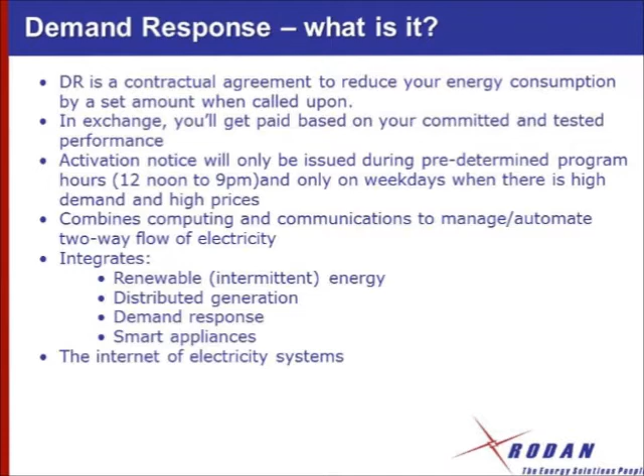So demand response, what is it? To start, it is a contractual obligation, and that's my job out in the street with customers, to introduce it to you folks. It's a contractual obligation to reduce energy consumption by a set amount for a set period of time.

The ISO, or the province, rather than importing expensive power from the US or Quebec or wherever else, or rather than turning on a peaking generator, will activate our suite of customers, or our portfolio of customers, to reduce that set amount. We have almost 300 megawatts under contract, so we act as a power production facility by reducing load on the grid rather than producing onto it. It's a unique way of creating a stable grid.

The activation notice is very specific. It's all done in a contractual fashion, from 12 noon up to as late as 9 p.m. at night. So a commercial building, for sake of argument, would only be participating from 12 noon to 6 p.m. They wouldn't be forced to do anything up until the evening.

But a lot of the bigger industrials have processes they can shift or shed to a later period, and for that there's fairly significant financial remuneration for shifting operations or curtailing. Some of the big steel mills can simply turn down a blast furnace for 4 hours. That's a big sigh of relief for the grid—on a screaming hot day in August, they can turn all of that stuff down.

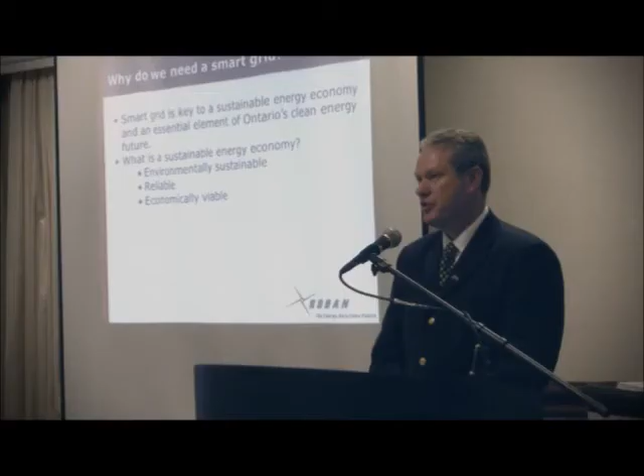Hydro One operates on a 5-year approval process and a 10-year implementation process, so when you understand the energy sector and how slow it takes, getting the rollout of the smart meters done was pretty impressive, and to work with that group in a 10-year business cycle. I don't know any business cycle that can work under a 10-year business model, but that's how they do it.

So the next image is basically a picture of the smart grid. It kind of gives you an overview. We've all seen this before. We all live it every day.

The idea is creating a truly smart grid and creating buildings that will talk to one another. I rely on you guys installing systems and strategies to help buildings communicate better, understanding how the system or how a building can perform better. And again, my counterpart here has got a software that will do that and integrate into that. I guess AIRON is trying to be a leader in this field as well.

Rodan has got contracts with many different LDCs across the province, 50 or 60 of them, to deliver demand response in general. We also have the Peak Saver program, which is provincial in scope. Through AIRON we're trying to identify buildings that can participate at basically multi-level. You've got the ability to get access to the building automation, control things remotely, using that system through the ANT system that he's got, so he can message back to the building owners when required, and use the systems to identify when the grid's in distress.

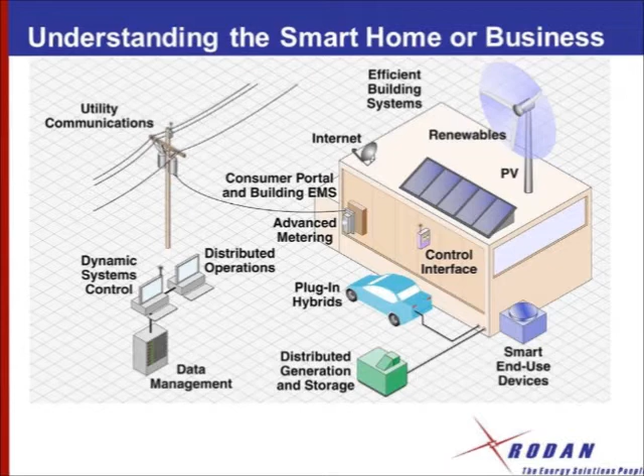So that is the smart grid in general, and it's going to get more complex as the next slide identifies. You've got plug-in hybrid cars. They're coming, we will get them. It's just going to take time and adoption. I'd like one.

The one box that you see down at the bottom, distributed generation and storage, that's another very big component. It may not fit with this group today, but integrating that strategy with your customers to have a clean power production source that can be activated when required has significant revenue opportunities.

So many buildings you service now have a backup generator. It sits in the basement, on the roof, or in a box in the parking lot, and does nothing. It's there when needed, maybe once a year. They're forced by code to run it monthly for half an hour, and it spits out black smoke. Those engines, when cleaned up and run as efficiently as our cars, with catalytic converters and emission controls, produce no more black soot.

You can now follow a Volkswagen diesel and see no soot, right? They're clean. They're in every driveway, or they want them in every driveway, but those engines can then be used for a demand response call. When the province is in distress, you literally flip the switch on that generator, and all of a sudden you're getting a payment for that service.

So you turn a liability or an insurance policy - a lump of steel in the basement - into a revenue generating source. I work every day with those types of customers to help them understand that you've got an obligation to your stakeholders and tenants to utilize technologies and systems to benefit from that. Rolling in a demand response call and a building automation system as part of that play just widens and deepens the incentives available. So it can make quite a difference on the bottom line for a company.

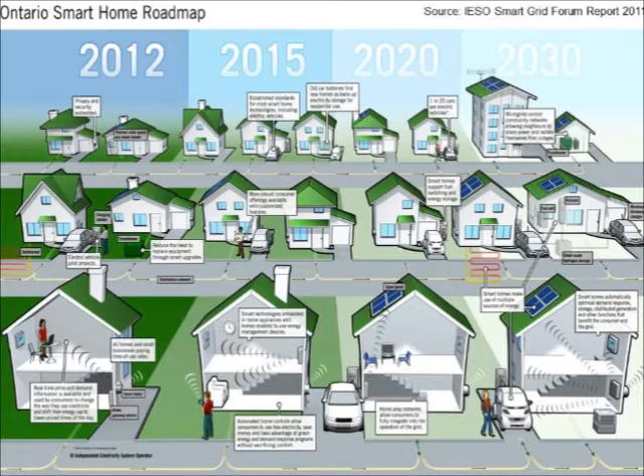The bigger, the better, I can share that. Like I said, there will be a slide - I've got another slide coming up on the financial model. This slide clearly identifies where we're headed. I think we've all seen it. You guys are on the front lines of trying to implement this from a corporate standpoint and with the customers you're working with.

But understanding that you're on the front lines, you guys help companies make some of these decisions. Demand response isn't going away. The FIT has been reevaluated, the CDM is being reevaluated, everything is being reevaluated because we're running out of money. Demand response is the cheapest resource for the province to generate power because it doesn't cost anything - they're not having to build a new power plant. That 'not in my backyard' model disappears because it just disappears off the grid.

So that's one of the key components to all of this. Communications are going to be the key. Looking at some of the technology on the table here, without that technology, it's not capable - buildings aren't smart enough to do some of this stuff. Speaking with some of my colleagues here, having maintenance plans and touching the systems on a regular basis keeps them operating optimally so they can perform.

Typically in a demand response world, you're working on a 3 to 4 year plan. So this plan has to be implementable and repeatable for 3 years. That means you have to touch those systems again, which in your case generates another service bill or service ticket to make sure everything is operating the way it should.

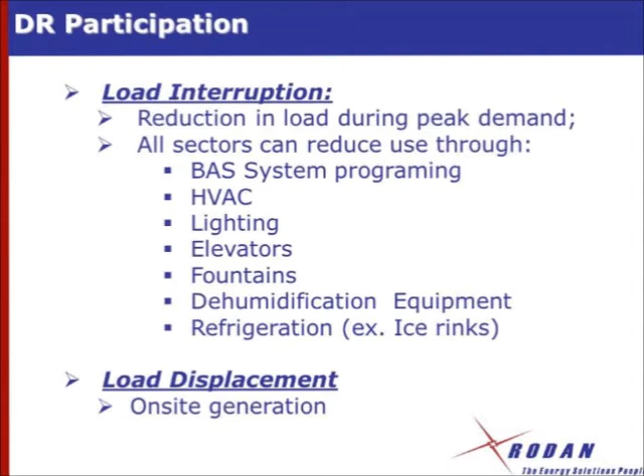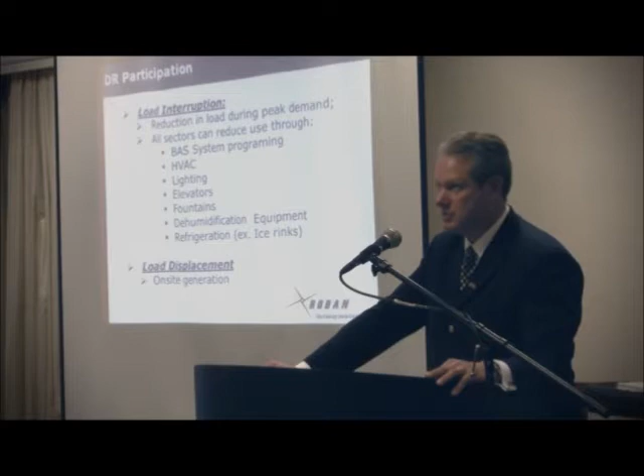And it's seamless to the homeowner. No homeowner has ever called back to complain. No homeowner is ever, I'm too cold, I'm too hot. Typically it's happening in the summertime. I guess 7 of the 11 events last year were in the summer, so people are not home. So their air conditioners are running all day. All of that kind of stuff, it's a non-issue, and it's for 4 hours. So it hasn't impacted that home or that household.

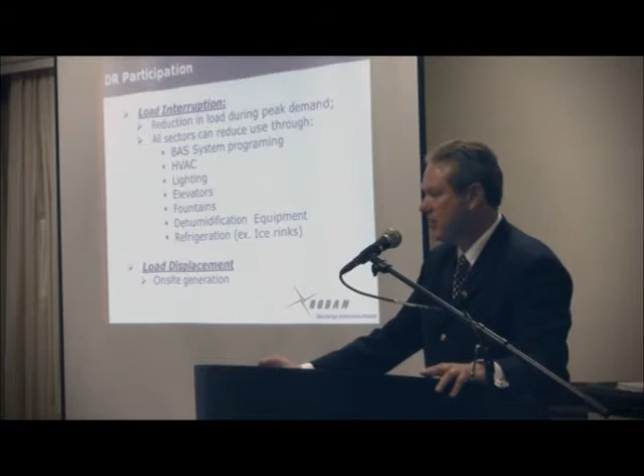So you translate that to a commercial building, and it's the same effect, if it's done effectively, activating all of the systems that I've listed here, and I'm sure you guys can think of more systems that you could impact. And quite honestly, I can't imagine how many fountains you guys actually control, how many elevators you actually control, but that's where connecting them to the building automation system, creating a DR day protocol, creates a little revenue for yourselves, because you have to add more things to it as part of your building operation solution, if you will.

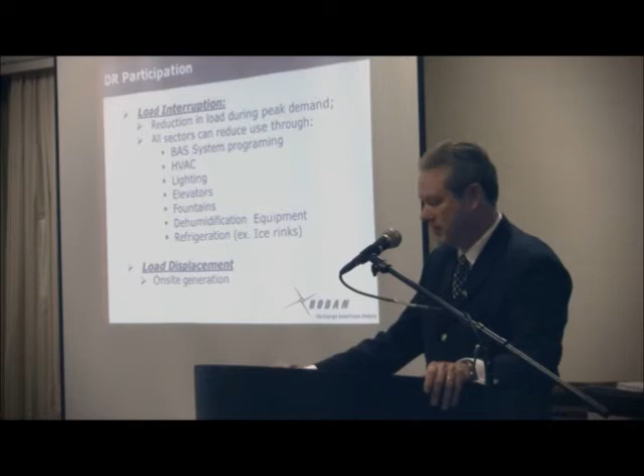So I always try and put as many things on as possible. If you don't control it, you can't affect it, you can't reduce it, so you can't be paid for it, is the simple way I put it. So the key is trying to find and identify equipment on site that could be curtailed. And on a peak, screaming hot summer day, does anyone really care if the water fountains are running out front? Absolutely not, right? It's not going to impact operations per se.

We do a lot of the shopping malls, Vaughan Mills, all that kind of stuff. No one's ever complained that the fountains have turned off for 4 hours on a screaming hot day. The escalators, 1 out of 3 escalators, stop running for 4 hours. They put a sign up that they're under maintenance. It's very simple, but those are proven energy reduction, and that's what they get paid for. So again, it's being a little creative.

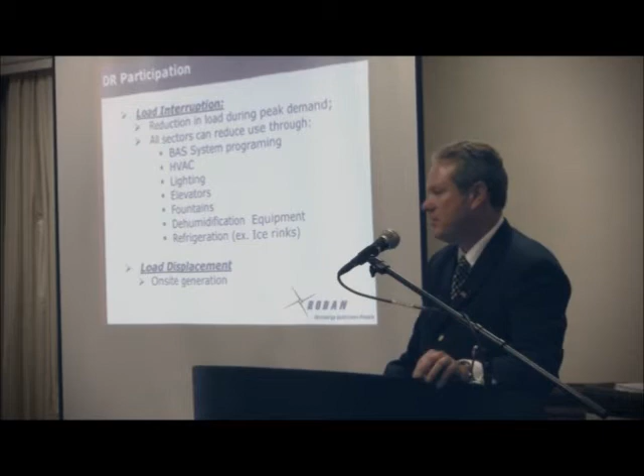I hope I'm inspiring your minds to think about some of your customer base and some of the things that you could impact. And I'm trying to instill a concept of how can I increase revenue for my company and connect more loads that we currently don't control that could offer a revenue stream to the customer that they didn't know was there before.

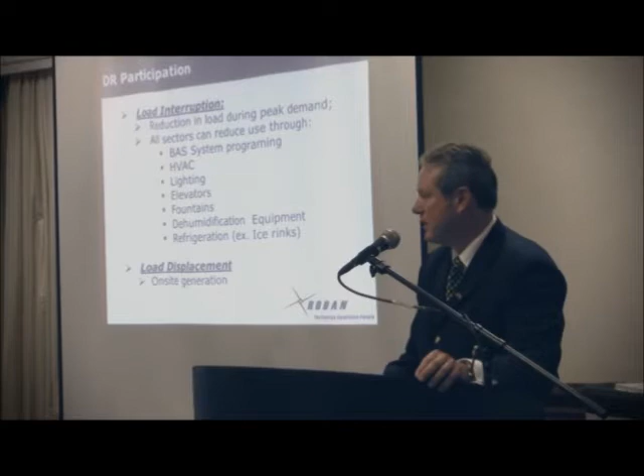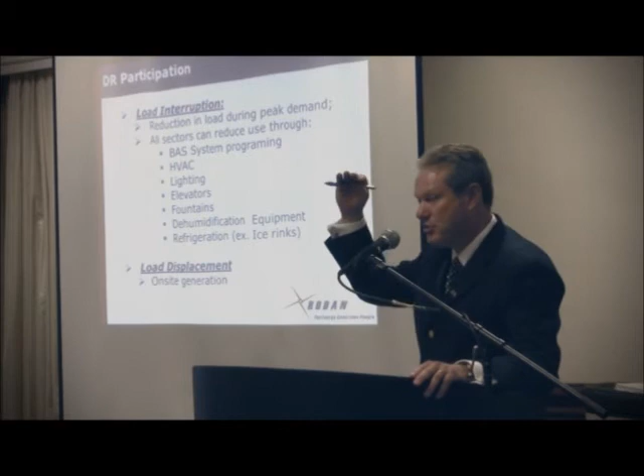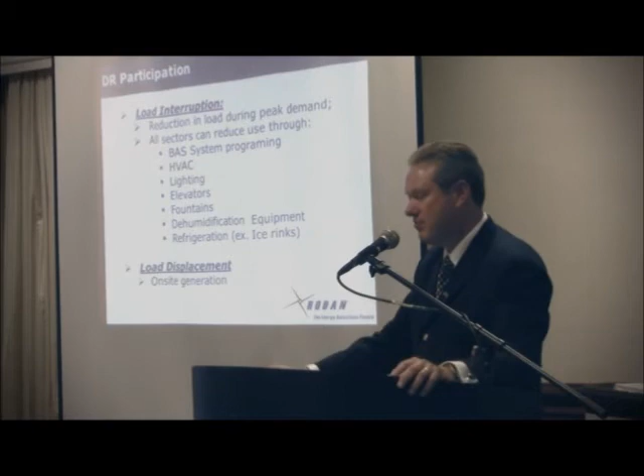And then I've gone through the load displacement. So the hydro meter is consuming this much at a certain point in the day, and every day it consumes this much, and you turn on that backup generator and all of a sudden that load goes down to here. That delta is what you get paid for. So the on-site generation concept is equally as lucrative. They don't discern between a kilowatt being curtailed or generated. It's the same payment and the incentive amount. And there comes the incentives page.

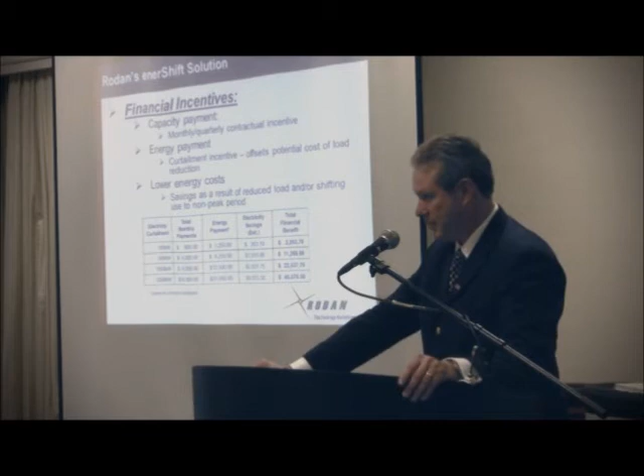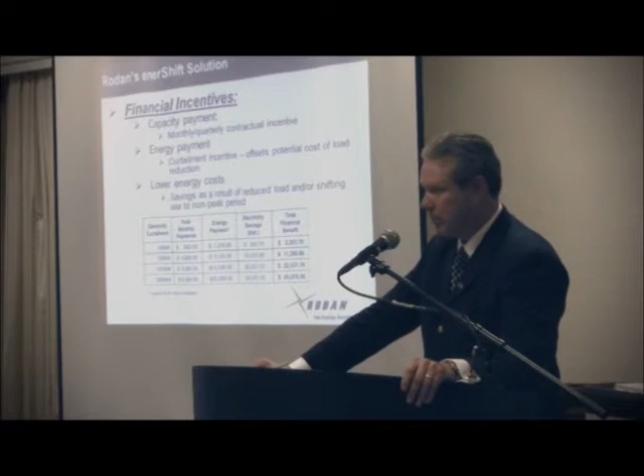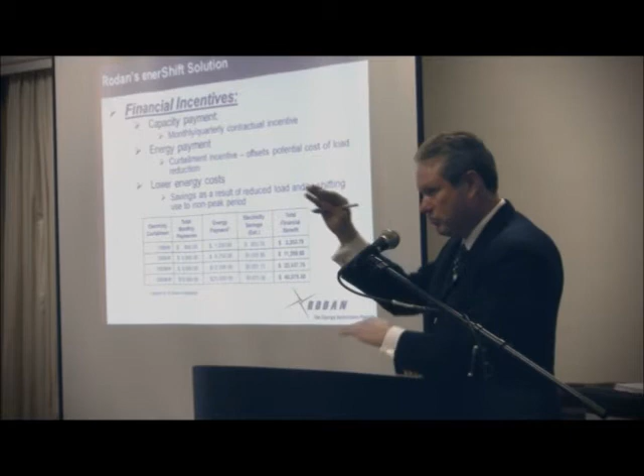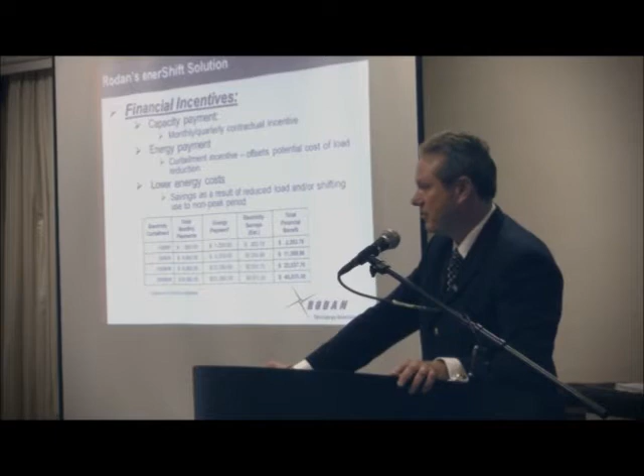And our team in Mississauga, that's what we analyze every single day for every single customer, that their availability is still there. It hasn't been eroded. They haven't shut down operations for 2 weeks and didn't tell anybody. Because if we do get a call and that contract is in play, you're supposed to be able to cut your load in half. But, oh, we're on plant shutdown this week. No. I need to know about that because we pay you on a daily basis for your availability. You get settled on a quarterly basis.

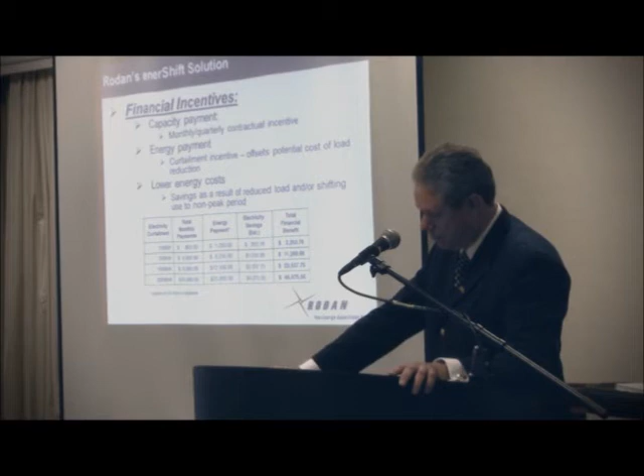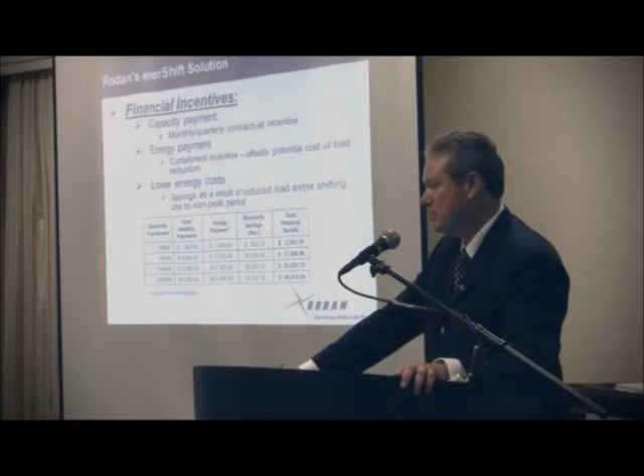So this little chart kind of shows you the incentives that are available. And these are monthly payments, so you can see that on a year, the money is pretty staggering. So if you're curtailing a megawatt, 1,000 kilowatts, times that 22,000 times 12. It's a big number. Do 2 megawatts, use a generator, 2.5 megawatt generator. You're talking $250,000 plus a year for doing it and for using it, for it being available, for not necessarily having to activate it. It's maybe been activated 11 times. 15 times is the most DR has been called in a year.

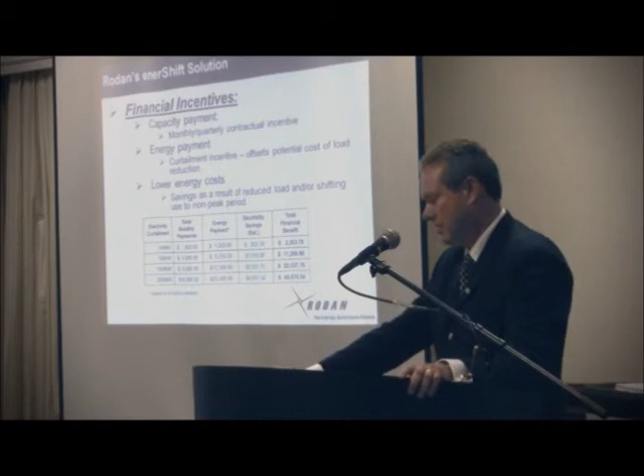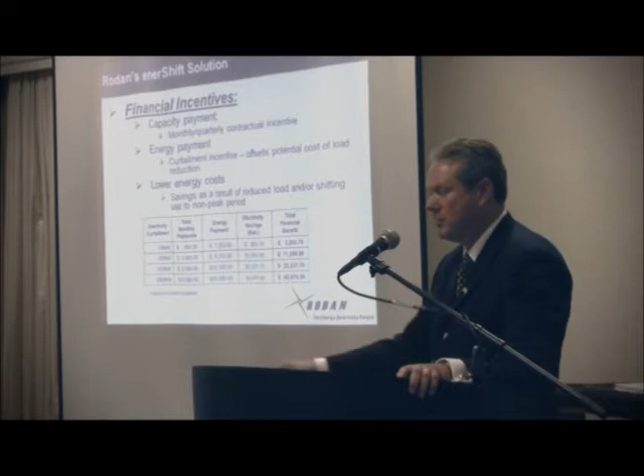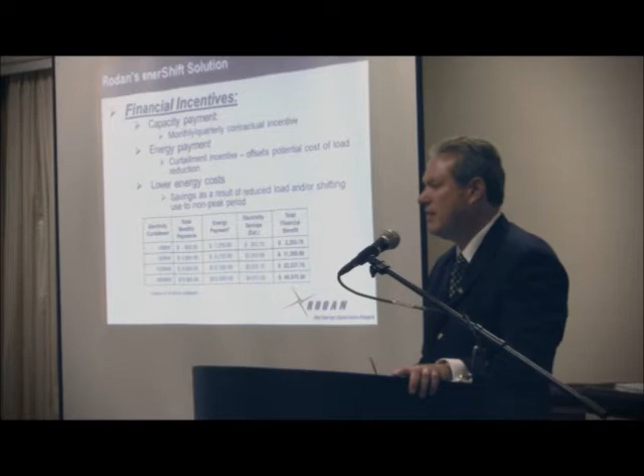So companies can then plan, budget, and monetize participating in the program with virtually no cost. And I say virtually because there may be some management or some enablement costs from a building automation standpoint, but the numbers are real, and it can be financially planned because it's a contract they've entered into for 3 to 4 years. As of today, the program is running till the end of 2014. All incentive programs are running until the end of 2014.

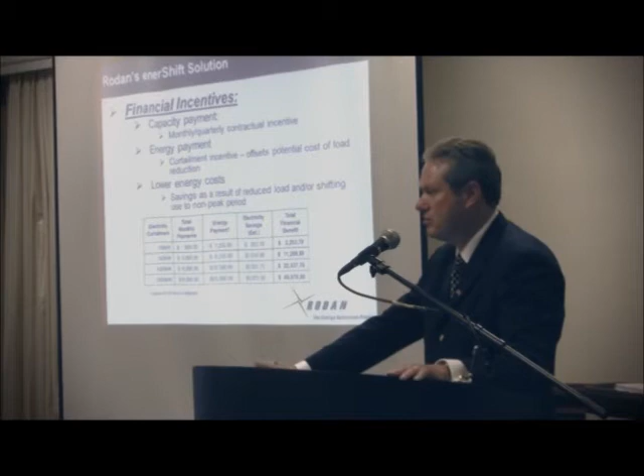The government hasn't extended. Demand response is part of the long-term energy plan for the province, which is going to 2031. So they're using demand response as a play well into the future. Again, it's a simple power plant. Instead of turning one on, they turn one off. That's how they treat us. We're the turn-off group.

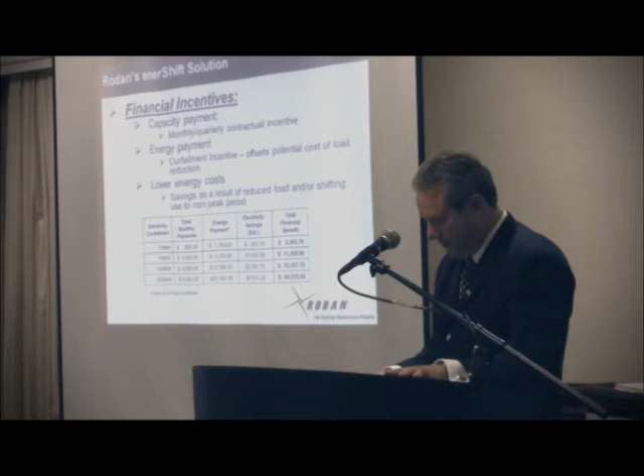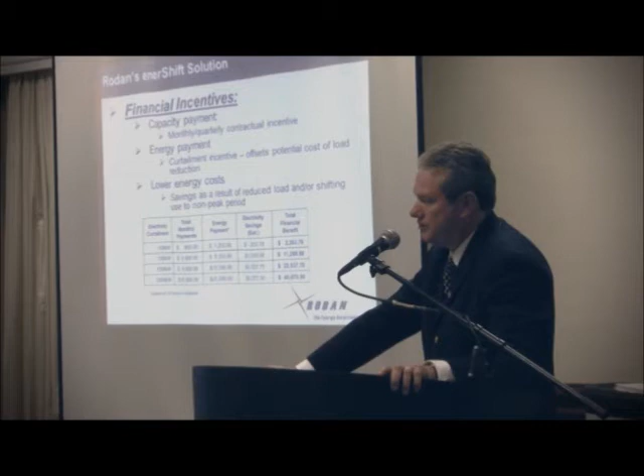So there's your financial model. Before I flip this page, does anyone have any questions on the financial model? Yes? So, us as BAS people, do we offer certain times to you because we know the system and through our BAS we offer it, or do you come to the end user and tell them when they need to turn it off today or tomorrow?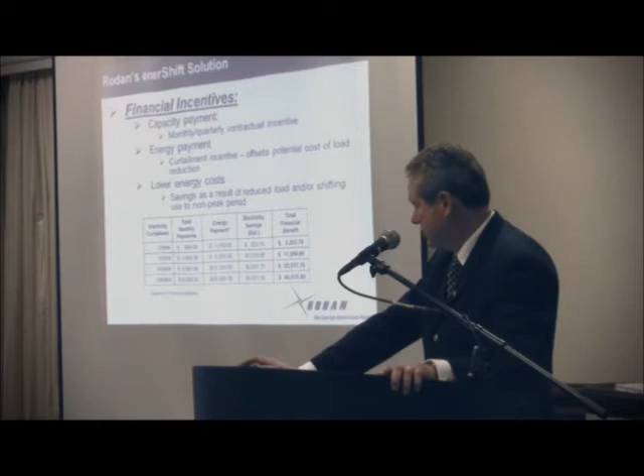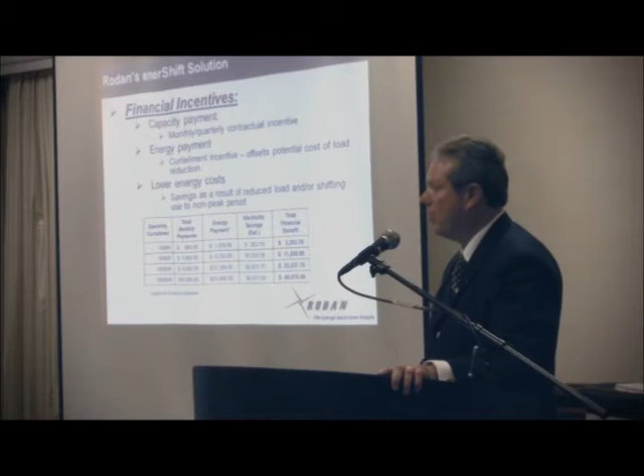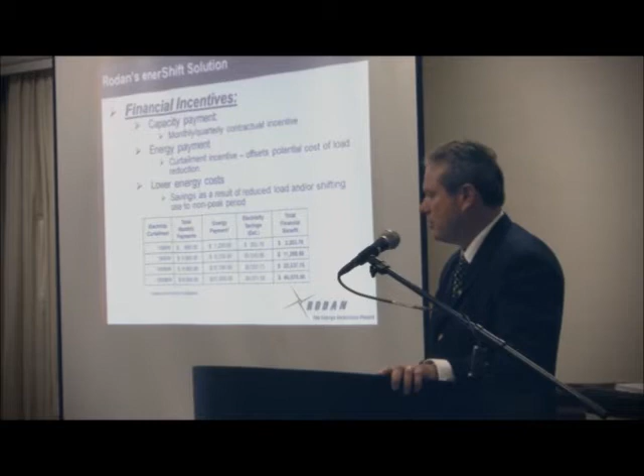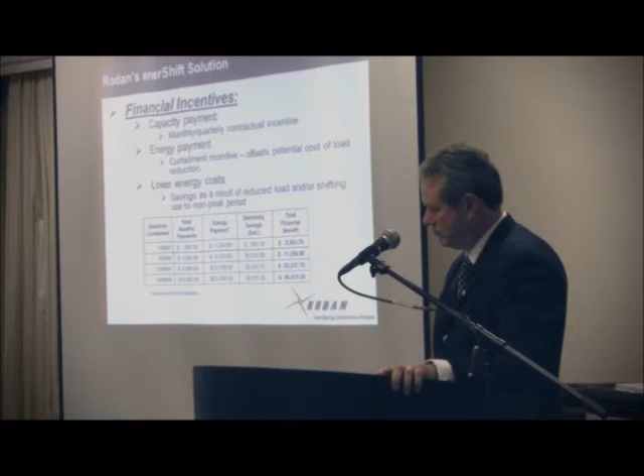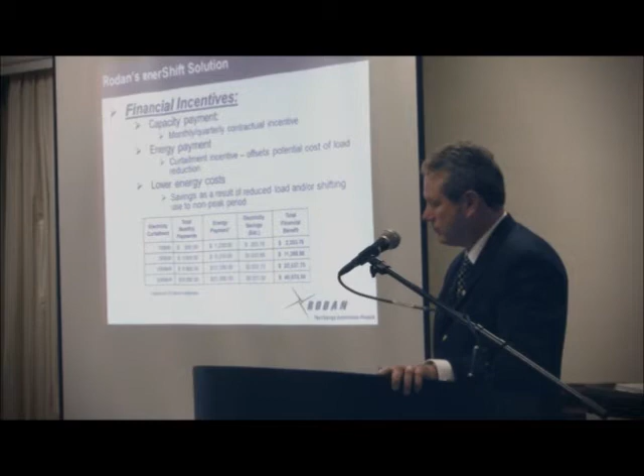Now, what if we can identify times, us as BAS people, when you can reduce the load, and we can tell you, can that power be stored somewhere for later and generate revenue for our customers? So the question is, can you store the energy that you normally would have consumed but are not consuming and put it into a storage device? Say through occupancy, right? If we know that this room's not going to be occupied, we lower the lighting, that's saving energy. Correct. So in that case, that is simply an energy saving strategy, and that I can't pay you for, but the customer's bill is going to thank you very much for it.

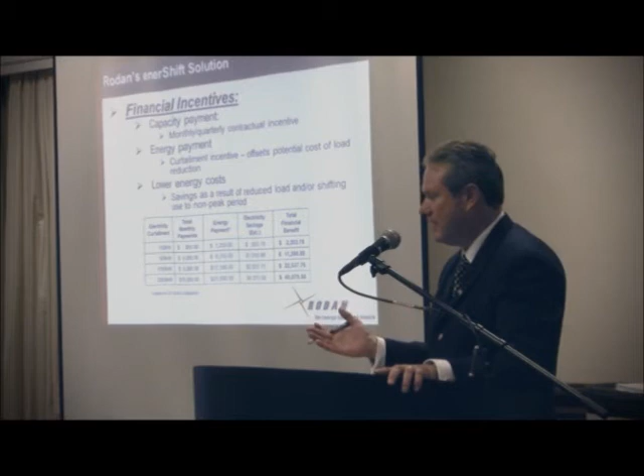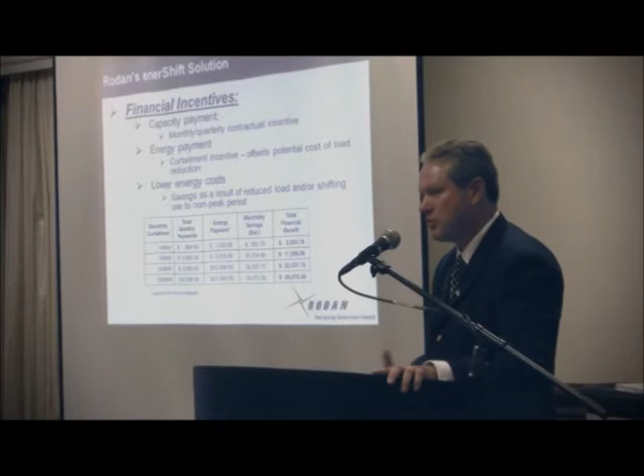So, let's agree on the contractual relationship and the performance relationship. They're 2 different things. You guys have got to perform. You're bringing value to your customer base. With the province, we're a certified aggregator. I can't contractually pay you for that, but I think your customers are looking for you to do that. And that's your value add to the marketplace. And if you're not doing it, your competitor is. Does anyone else have any questions?

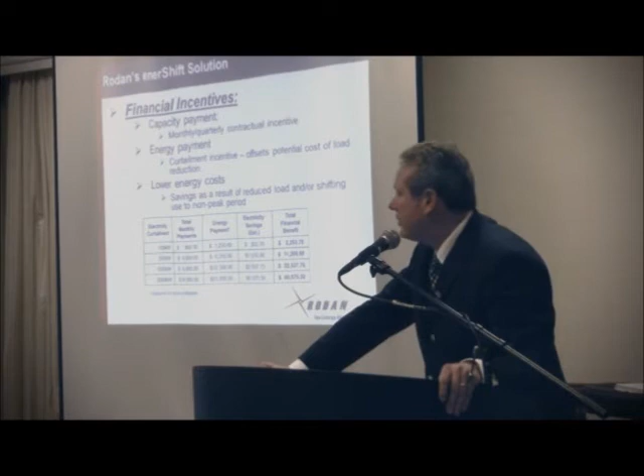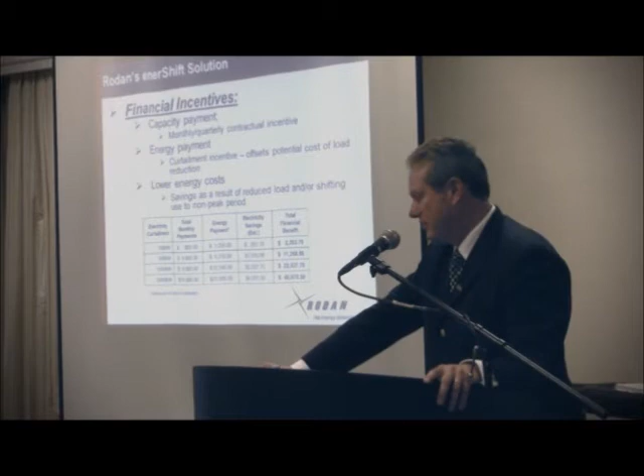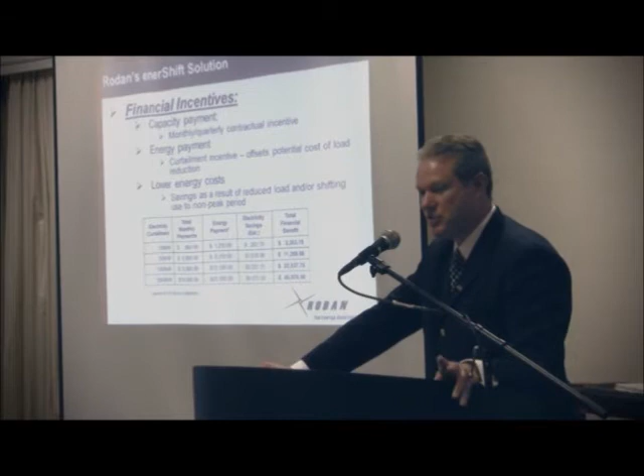Yes. Is there a limitation on running backup power for load displacement? Do you have to change your C of A to do that? Correct. It has to be clean emissions. It's got to meet 2011 MOE, Ministry of Environment, emission standards. And the C of A is a critical component. If anyone has seen this certificate of approval, a C of A, all these generators, when you build a building, are typically named in a C of A as emergency backup. When you apply to the MOE for a peak shaving C of A, you want to amend that C of A so that you can use it for requirements other than just backup.

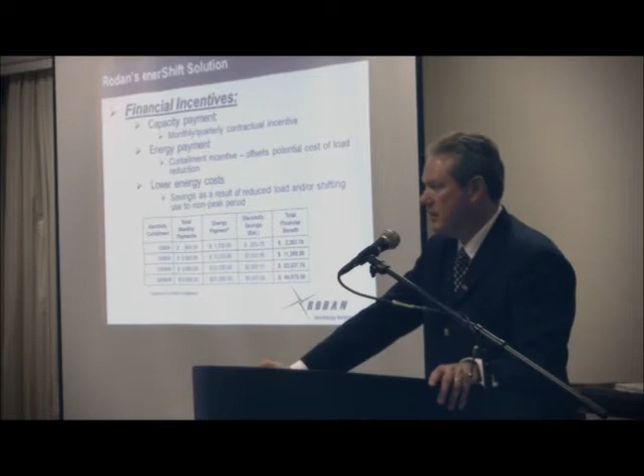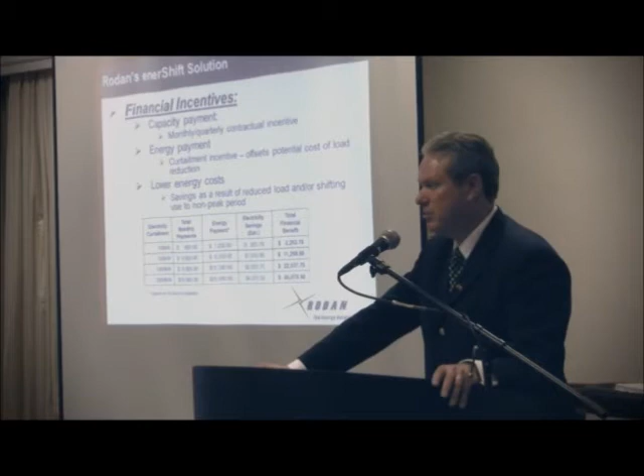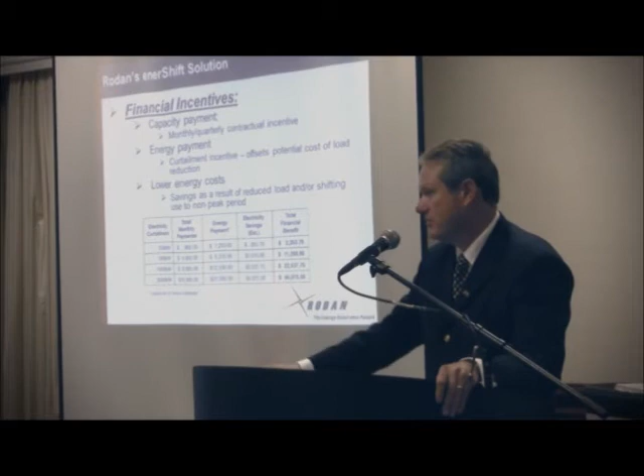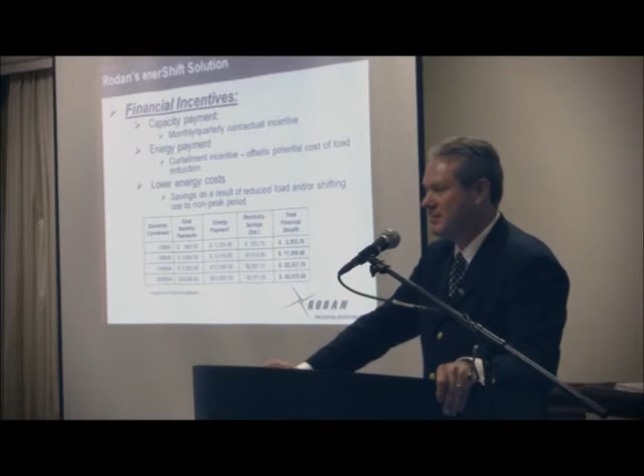It must meet very stringent emission standards. No more stringent than your cars. It's capable, it's doable, it's repeatable. Every engine is somewhat the same. It's an internal combustion engine, whether it's diesel or natural gas, so they can meet those standards. So that's a good question. And that is my arm wrestle every day, that C of A amendment. The Ministry of Environment is at the City of Toronto today trying to get through some of the red tape that's required. So I'll keep moving.

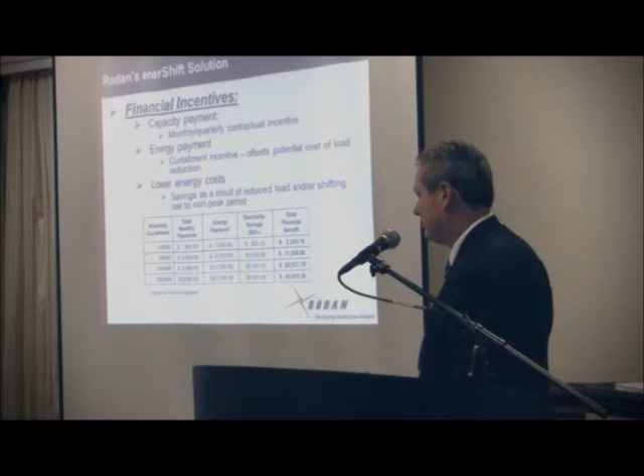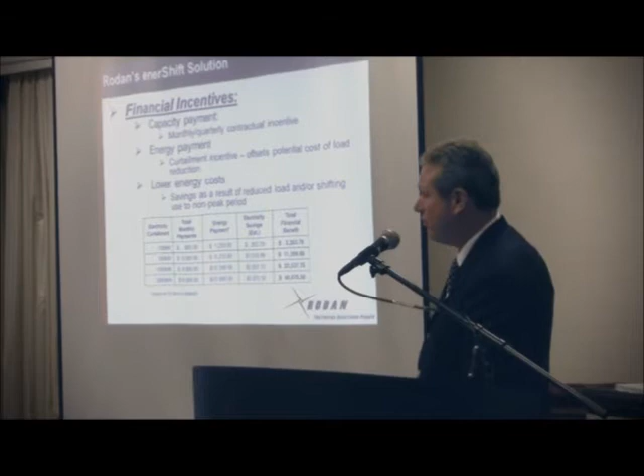If there's no more questions, we'll keep moving. One more. Oh, sorry. Yeah, sure. I'm wondering if there's any financial penalty, aside from not getting the curtailment incentive, for a customer not abiding by the contract. This gentleman has asked a very good question. So the question was, are there financial penalties if I do not perform to the contract? The answer to the customer is no. The aggregator has to absorb those penalties.

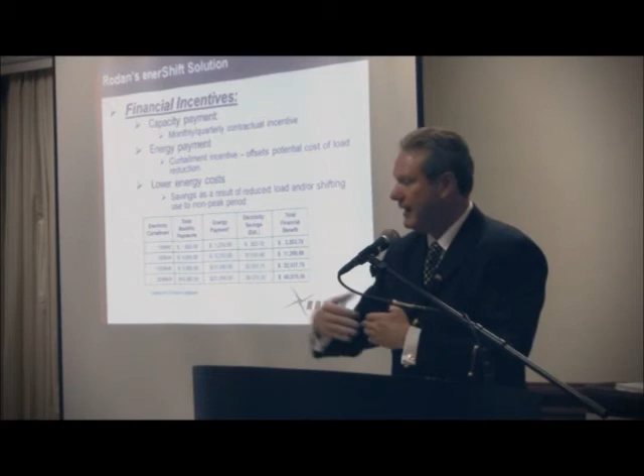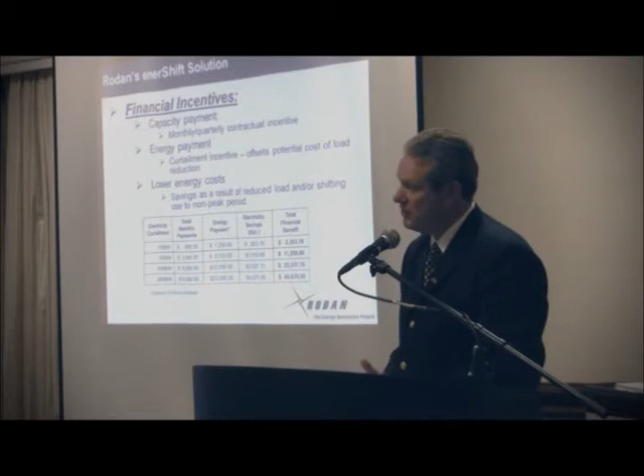That's why the province has set up an arm's length system. They've got the provincial government, so that's the one body. Then the aggregator is the intermediary with the customer. And our portfolio has got to deliver as promised. If a customer does not perform 3 times, we kick them out of our portfolio, because we've absorbed 3 penalties on their behalf.

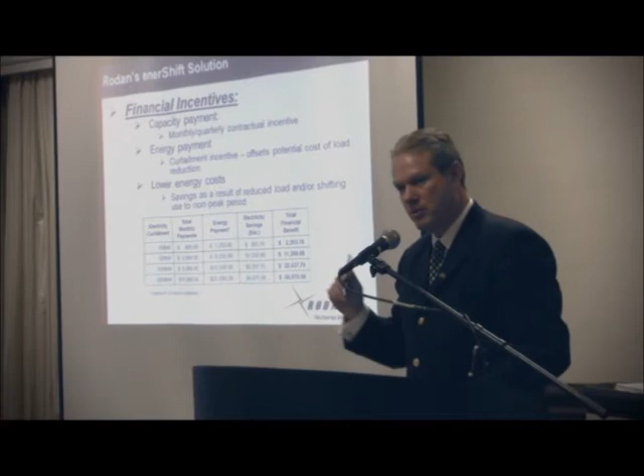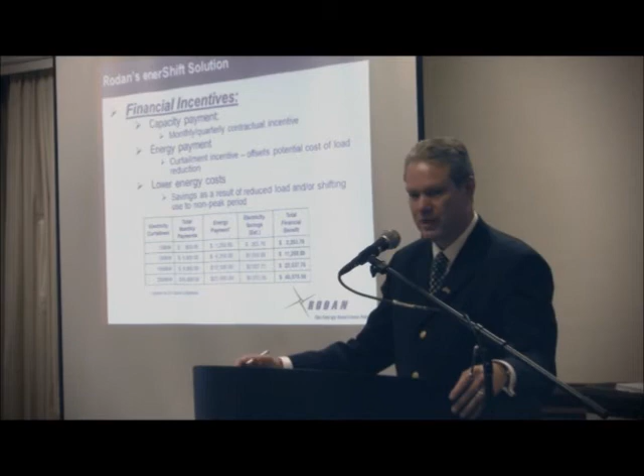So the key message is doing it right the first time, doing it right when you enroll, doing it right when you put the DR-Day protocol embedded in that BAS system. We've tested it, and I'll show another slide where we test it twice, in actual fact, to make sure that it can perform as promised, and the building owner and occupants have not complained, there's been no issues. So that's our first test. Then the second test, we'll do at a different time frame to ensure that it's met its performance criteria, and we might even reduce the curtailment amount or the kilowatt amount just to err on the side of caution.

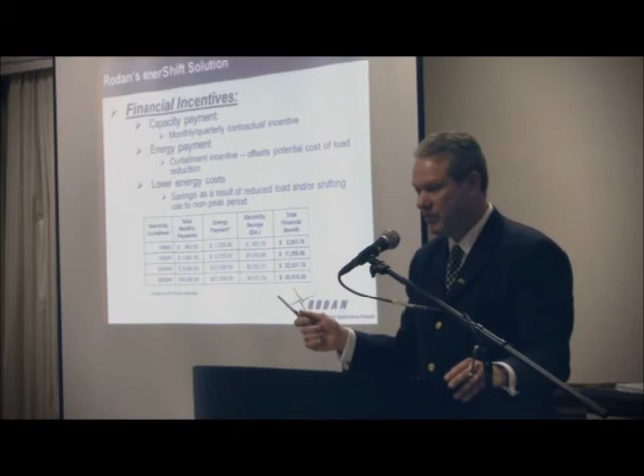So there are no financial penalties, and that is again the burden we absorb. If they don't perform, then we've got to go back somewhere, call up one of the steel mills, guys, can you slow that line down that you're working on this afternoon? We've got to find it somewhere, or we just pay the penalty.

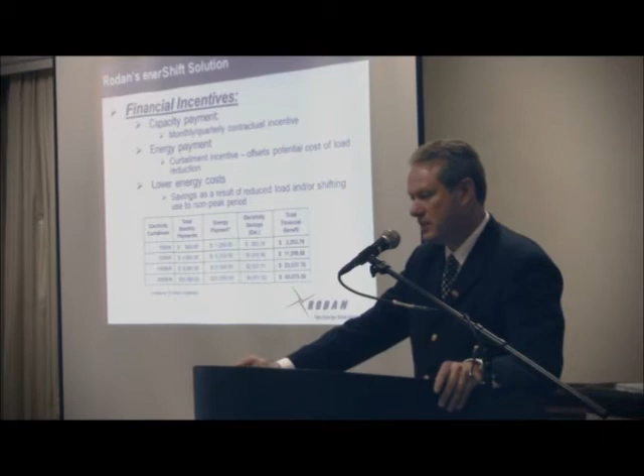So a good example, and I'm working on this project, is a water curtailment. Water facilities, essential service in the province, they all have significant backup generators, very big backup generators. So I've got a contract in front of them, and they've got to be able to perform as per contract 3 days in a row. And the water group says, I can't do this 3 days in a row, not a chance.

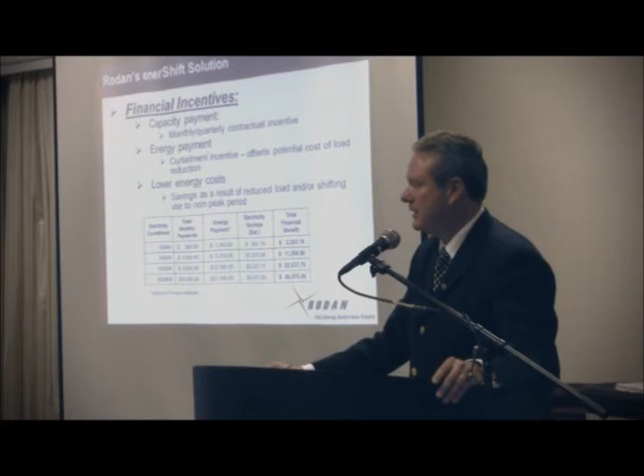I can pump water into all the reservoirs. You tell me a day before, and I've got a special condition that we set out. We'll pump water the day before, fill all the reservoirs all night long, so that if we do confirm a call tomorrow, we'll just use the reservoir water. But I can only do that 1 day, maybe 2 if you give me enough notice, but I can't do it 3 days in a row.

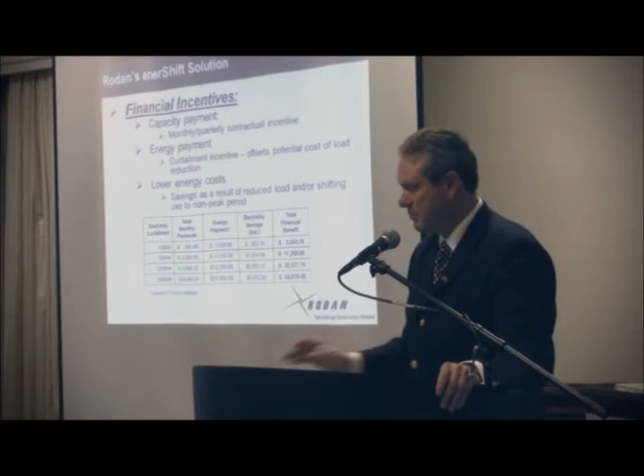It's game over. So as a company, we had to make a decision. Do we absorb it, because water is unique, right? If the water main breaks, we've got to act. So anyways, we've given a concession, and they don't have to perform as per contract, and we're going to absorb their penalties. So there's a special circumstance for everything that you've got to deal with.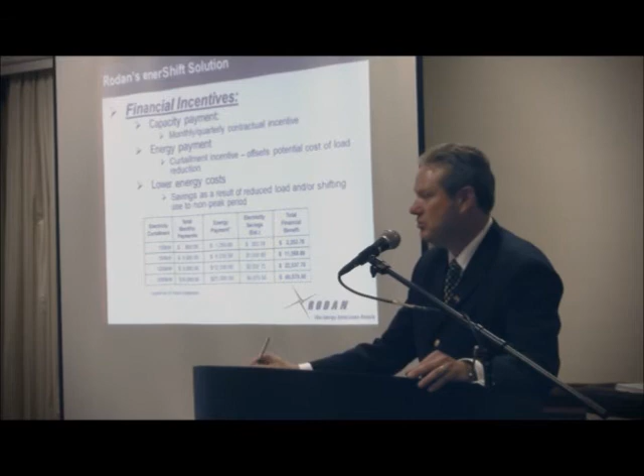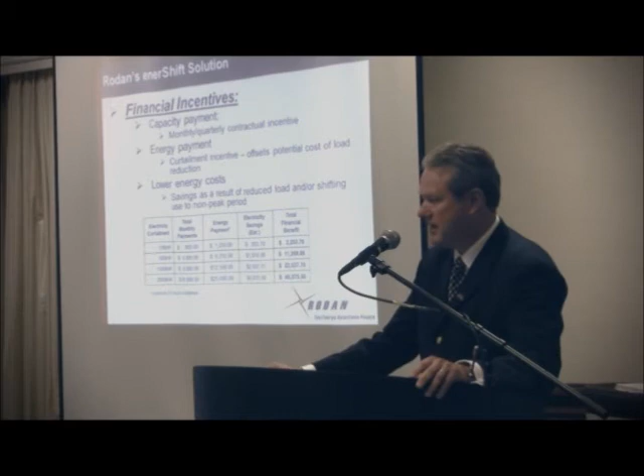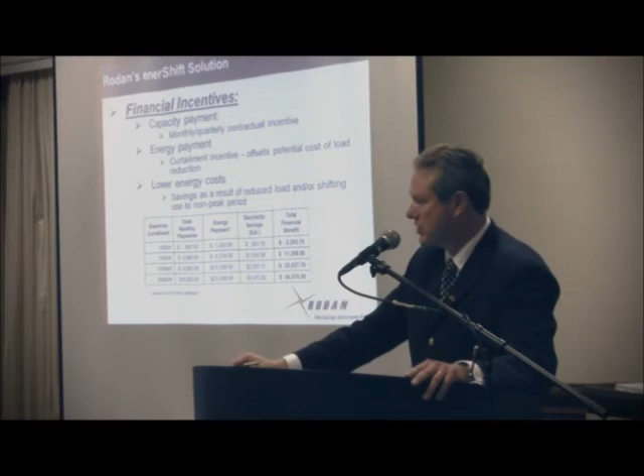And if a pure power outage happens in the province, we're under curtailment. Let's say it's 2 o'clock on August the 7th, and we know the grid's going to be in distress. They're importing power because it's screaming hot, and it's game on. Everyone's performing, BAS is activated, everything's doing what it's supposed to do, and all the lights go out. Well, the reality is you have to turn on your generators, run the building as you have to run it, and there are no penalties for that.

So, any other questions? Very good questions, by the way. Very good. Any other thoughts? I'll keep on moving here.

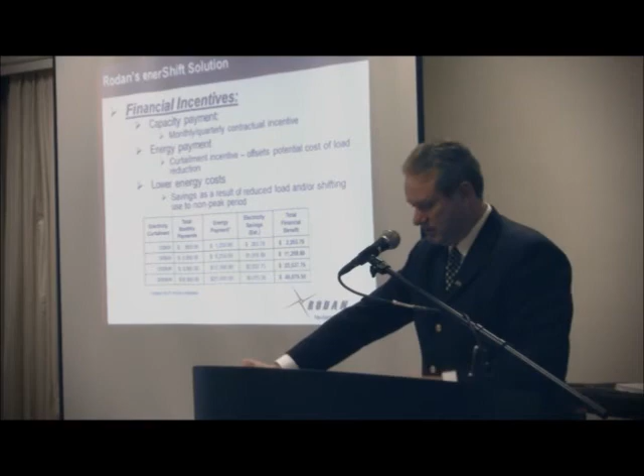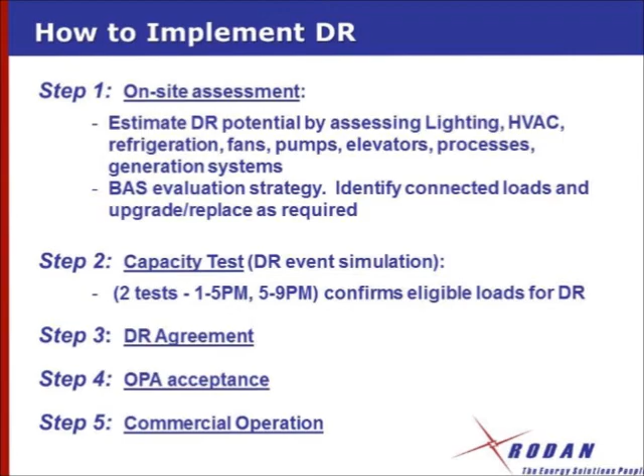So, how does it start? It's very simple, and again, you guys are the front line. I don't need to do a lot if we work together. The on-site assessment, you guys are there, you're touching it, you're seeing it. You understand the buildings, you're managing it. And if you're touching the various devices and things on the site, it allows you to go in and identify the loads that are not connected to the BAS and put a plan in place to put them on the BAS, implement that change.

So once you have done the assessment, you've viewed all the equipment that's on, it's sheddable, potential sheddable load. You change the hertz on the stuff. You work with the elevators so you could impact them when required. Put the sign out front. You go through the entire system, if you will.

Second step is we then do a test. We do a dry run, just next Thursday, 2 o'clock, activate as planned. So that's our test, and I do these on a weekly basis for the customers that we work with. We'll do a second test on a different window, so we work fine from 2 till 6, how about we do 6 till, or 5 till 9, just to make sure that everything operates to plan. And it could be 2 different curtailment amounts, right?

The building may be different 5 to 9 than it is 12 to 4 or whatever. So we will not contractually obligate the customer to more than the minimum amount that you can produce or curtail. A generator is easy, right? You turn on a generator, it's going to deliver 300 kilowatts, doesn't really matter what time of day it is. But if your building only consumes 300 kilowatts up until 6 o'clock and it drops to 150 after 6 o'clock, I can't pay you for 300. I can only pay you for 150, because that's the most. If you get called 6 or 5 to 9, that's all I can pay you.

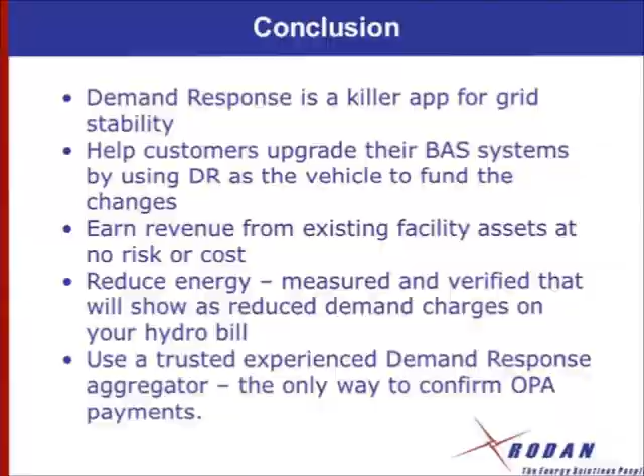So in conclusion, as Rodan, the leading smart grid energy supplier, it's - I'll use the term - a killer app. We are like a power generator, but instead of being turned on, we get to turn off. That's a very big thing for the province, and it's only when required.

There's not many things like this. A nuclear plant, you can't just turn down, right? They run. You can't shut down Niagara Falls. But in this case, they can shut us down within an hour and a half's notice - you're turned, you're activated. That's the bottom line.

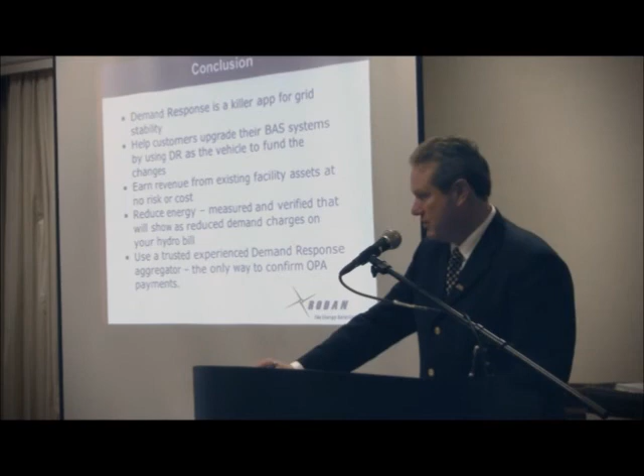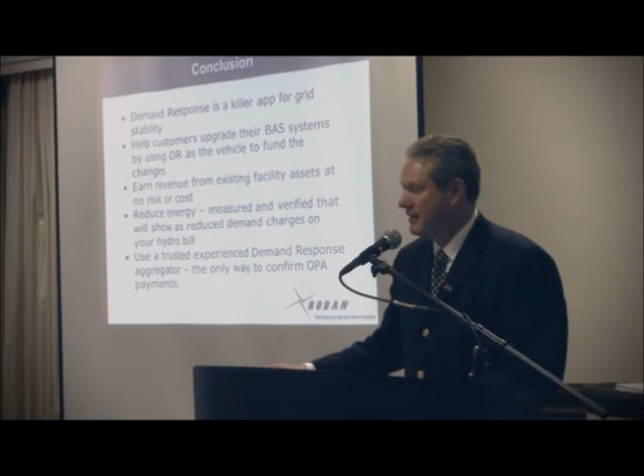Conclusions: you get to help your customers upgrade their BAS, you get to modernize the system to be able to participate. You're now an integrated partner into their system - not that you weren't there already, but you're bringing new and innovative solutions to the table. The idea is it allows you to send another invoice - that's, I guess, my view of it.

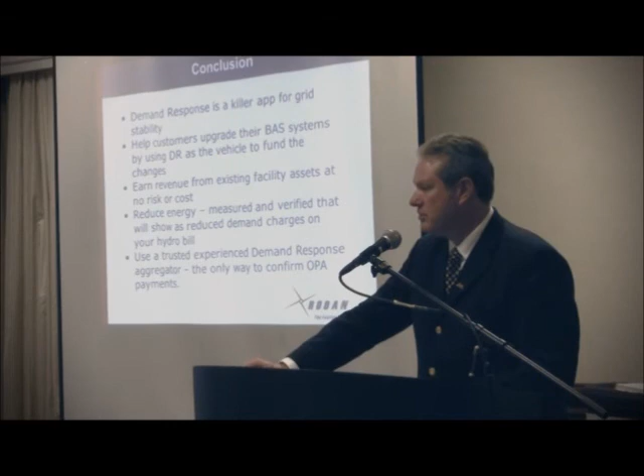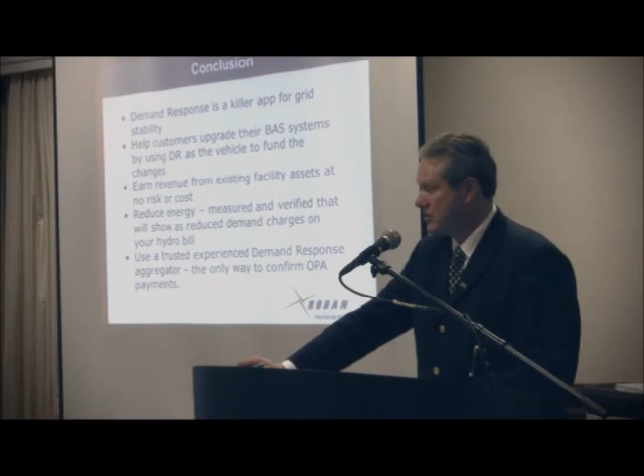I put earned revenue at no risk because there are no financial penalties. Customers get to earn revenue, which in turn should be generating revenue for yourselves. The energy reductions do show up on a hydro bill, and those are straight pass-throughs to the customer - I don't touch them, you don't touch them. The customer gets them, and they're real, because they're not getting paid unless it's been measured and verified.

And I guess the last point would be to use a trusted demand response partner. We are doing Peak Saver, we're the largest in the province, and we are the only Canadian company doing it.

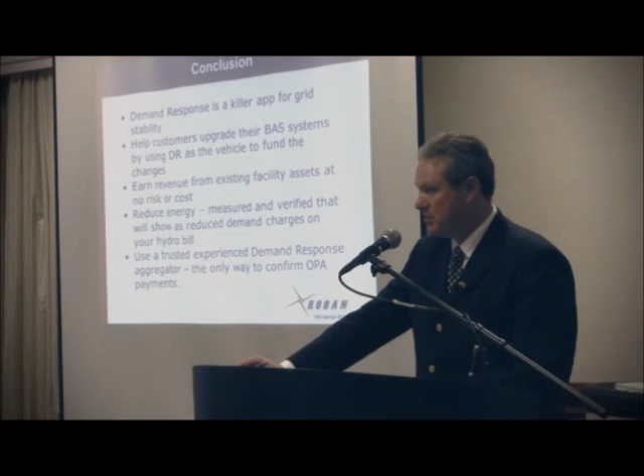And I guess that's the key message - on that same note, we've heard a lot about the distribution, the LDCs. The Patriot Act is now starting to come into play, where the demand response aggregators are all based out of New Jersey and Chicago, so they're not allowed to send the data down to the states.

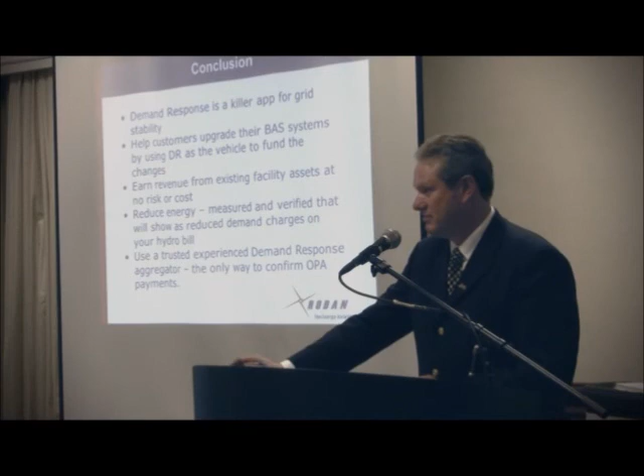They can't settle them because it's leaving the country. So anyways, use local, be local, shop local. Thanks everyone for your time.

Now, I guess, is there any questions? Are there any questions before I move on, or I'll turn it back over to Rick here and let him do his job.

Yep, go ahead. So say you give a customer a call, like Brock University, they have a cogen, and other places as well. If they turn that cogen on and generate the power, they get paid. If they don't turn it on, but they've enrolled in a program and that generator meets program requirements, they get paid regardless.

Brock is a candidate I think we are working on. McMaster's a candidate we're working on. There's so many sites in that arena that are real, live, capable participants. They just don't know about the program. I can't get to every one of them, same as you guys can't get to every one of mine. I can't get to every one of yours. That's why I'm doing these types of events, to get the awareness broader, deeper, wider.

Any other thoughts out there? We're all good? Thanks very much, folks.

Thanks, Ted. It's very informative. I think that Ted's presentation kind of spoke to everybody in this room based on what their role is in the organization they work for.